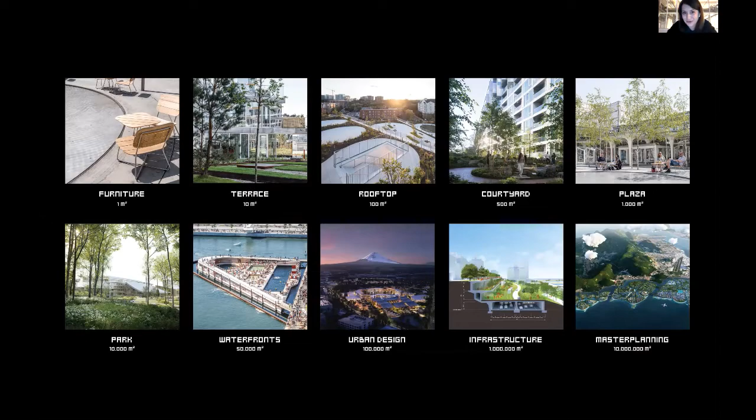We work on very different scales of projects, from bench scales all the way to regional master planning. A lot of our work actually integrates different disciplines. Of course, most of BIG's work is known for architecture and buildings, but we have been focusing more and more on really growing our landscape portfolio. I'm very excited today to show you a few of our works and how we actually work within our environment, which is extremely multidisciplinary.

I often joke that BIG actually started as a landscape architecture firm, which is not that wrong, because in 2002, even just before BIG started, we contributed to bringing people to the harbor of Copenhagen, transforming what was just an infrastructure for trade into an infrastructure for people. And also with the Maritime Youth House, we really brought people to experience the waterfront of Copenhagen.

We also tried in 2004 to really bring communities and residents to the rooftop of a cityscape. The historic city center of Copenhagen doesn't allow yet this type of public space.

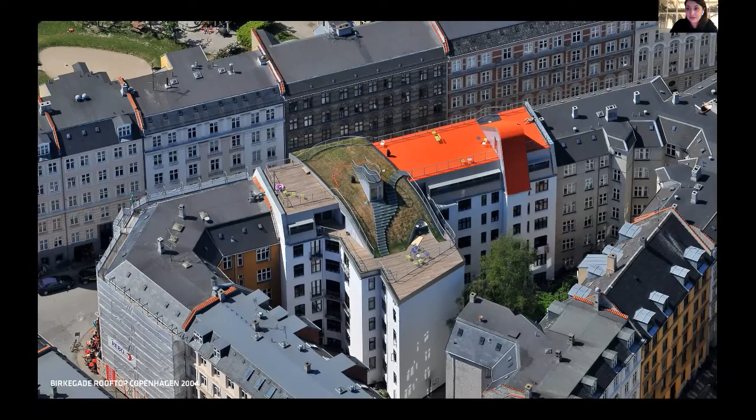We also started to reactivate forgotten areas in Copenhagen, like the Superkilen Square, where the diversity of the people living in the neighborhood has been brought into the public space with this eclectic mosaic of different urban elements that represent the different nationalities of the people coming together in this place they can sort of call home.

Our work really started at the beginning focusing on public space and landscape architecture because of the Danish sense of community. I'm living in Denmark now after New York, and I can really experience this sense of community and connection between the public here in Denmark.

But over time, BIG started to integrate more and more landscape and architecture together within the buildings, arriving to the point where we realized we had to break the silos, break the different disciplines, and start working much more closely with one another since the early design process to really try to tackle climate change and other cultural challenges we face today.

So in 2015, we actually founded BIG Landscape, and today we are working on different scales of projects that are tending to be more and more complex, addressing the future.

We call our world here at BIG the Big Leap, and we represent landscape, engineering, architecture, and product. We have all this expertise in-house, and we see the landscape team sits right between the engineering team and the product team and the architecture, and it's really nice how we can work together.

As landscape architects, we really have that kind of discipline that interacts with the different levels of design, from the architecture with landscape around the building, inside or above, with engineering, how do we build landscape on structure, how do we tackle the climate and the environment, but also working much closer with our industrial designer for product design, urban elements, and lighting.

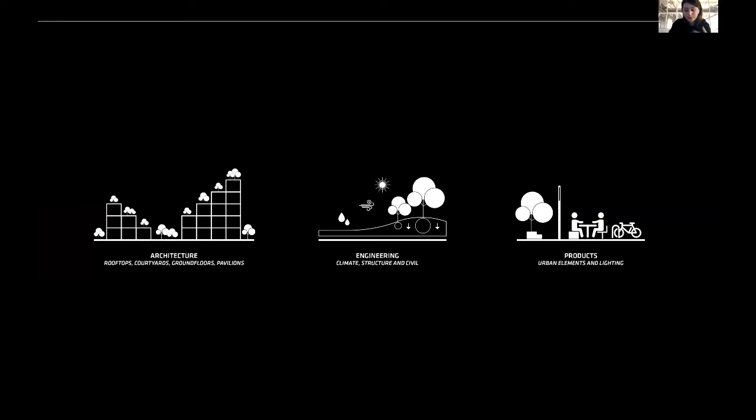And I will walk you through a few projects that go from the smaller scale to the larger scale that give you a sense of how we work here at BIG within our team.

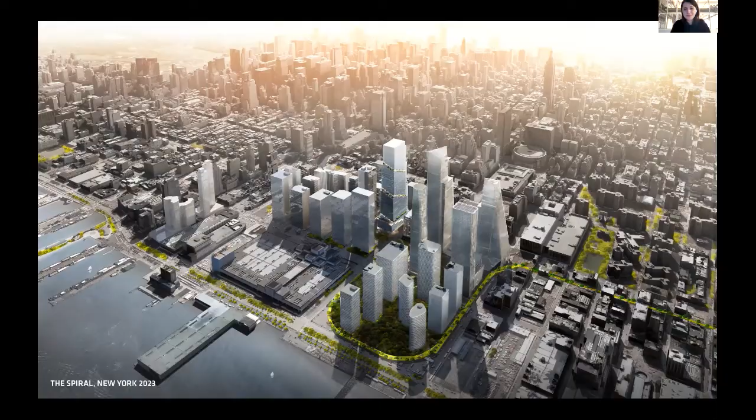This is the Spiral project. You can recognize the green spiral around the tower. It's in New York in Hudson Yards, and it's one of the tallest towers actually that are at the moment coming up in New York. What we looked at is creating a new form of public space, a spiraling terrace system that goes all the way up to 300 meters high.

That creates a different experience, almost a biophilic experience for all the workers within this office building, but at the same time also addresses sustainability and passive irrigation system.

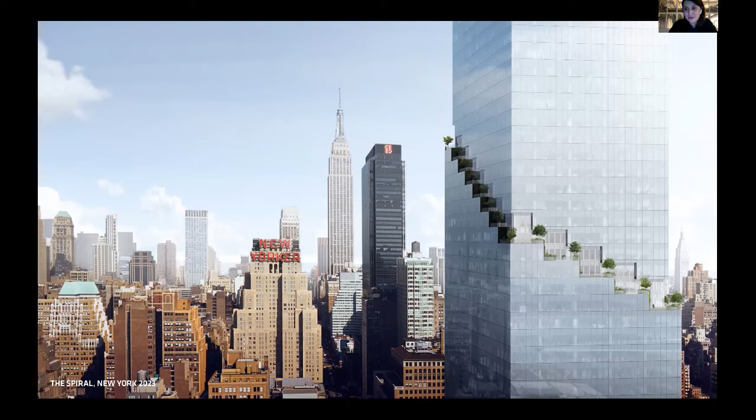You can see here that the skyline of Manhattan is really lacking open space, and you can see how the spiral can create a different type of public space within the skyline of New York, bringing nature also, not only people, all the way up.

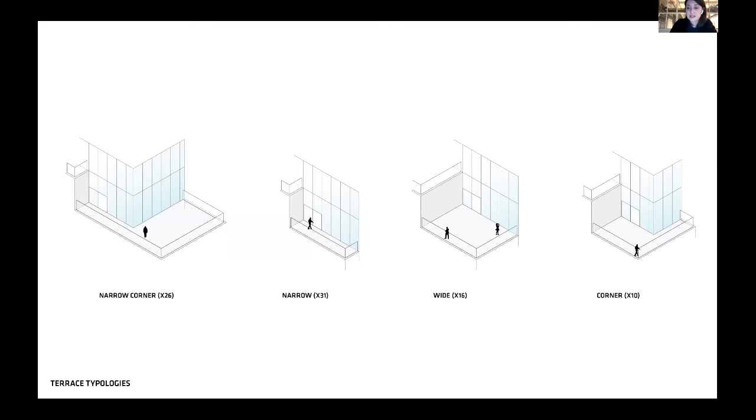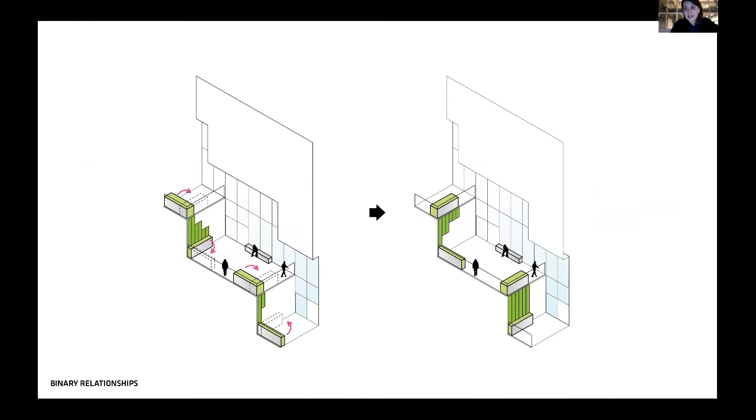The different terraces around the tower are very different, from large terraces to small terraces to corner terraces. What we worked on is a landscape concept that managed to bring nature, plantings, and people into these terraces, but also emphasizes this continuous terracing and the spiraling of the vegetation all the way up. We worked on vegetation on a horizontal plane, but also on a vertical plane, connecting the spiral to one another. You can see this continued cascading of green elements connecting all the terraces.

You can also see what we call the taco planters, planters that have the vertical side with exposed vegetation. Creating new types of public spaces, especially something that hasn't been done before, comes with a lot of challenges, such as code compliance, allowances for the facades, but also thinking about views and safety.

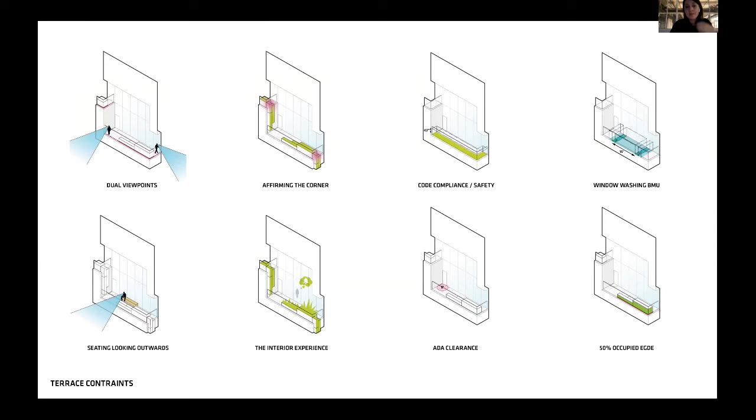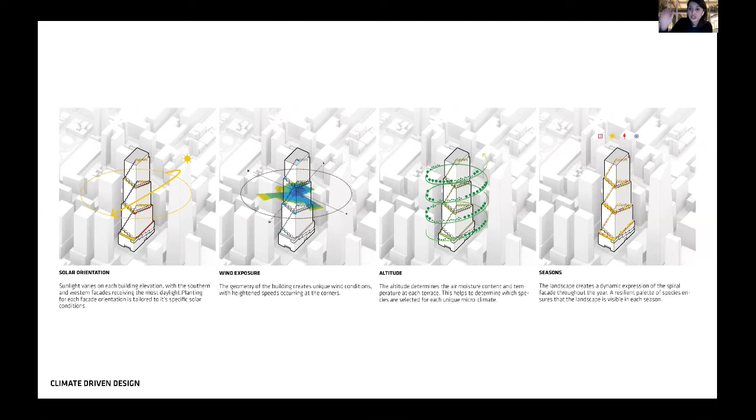Big challenges also come with the climate, because the climate really changes from the bottom to the top of the tower—it's really a different climate zone. Here's an example of how we work very closely with the environmental engineers, where we look at solar orientation, wind exposure, how the vegetation needs to change because of the altitude, but also the season and the time of day.

And we actually managed to simulate different scenarios of wind exposure or sun exposure to understand what type of climate these terraces have. And what we arrived at is that there are 3 different climate zones around the tower, each corresponding to a different planting palette, because we have a different exposure to sun and a different exposure to wind.

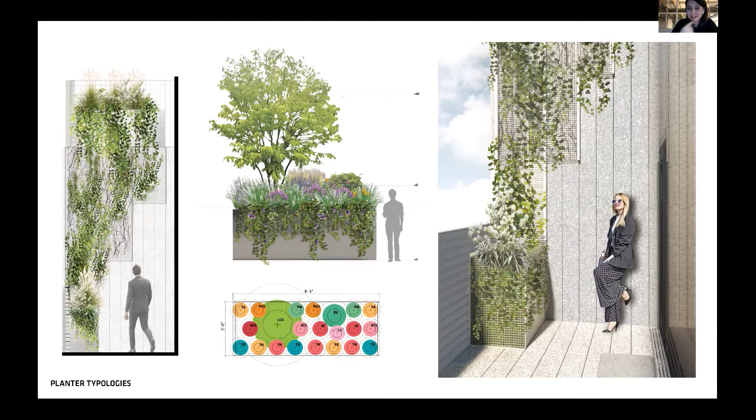And this planting palette actually goes from the planter all the way to the vertical elements and the trellis. So it's really like a continuous green spiral around the tower that adapts to the climate it encounters while turning around the tower.

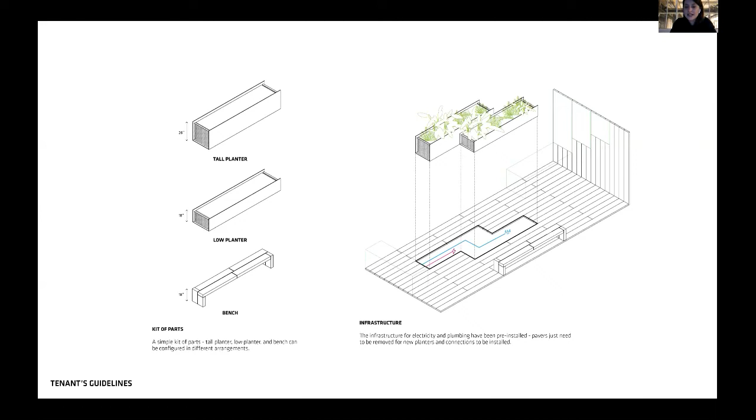We also looked at flexibility, because there will be different tenants leasing the different office spaces. So we looked at a sort of plug and play system where we create infrastructure such as irrigation and a structural load allowance for the planters, allowing different tenants to reconfigure the terraces as they would like over time.

And here you can see today, an image from a few months ago, of the spiral that just recently popped up in New York. You can already recognize the terraces in the facade.

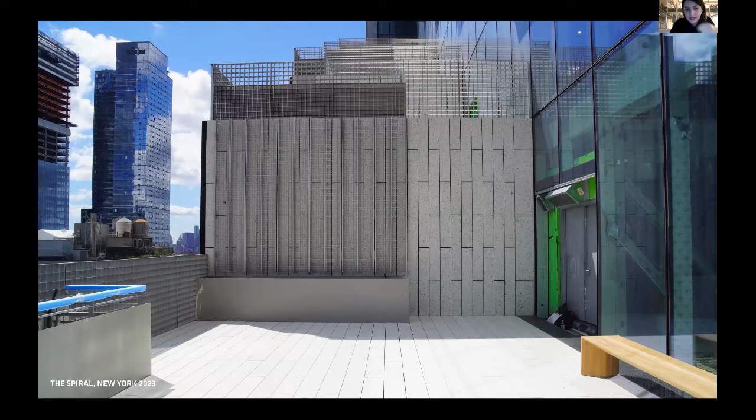And here you can see the first, the large terrace, where you can see already installed the planters with the trellis and the benches.

And we actually started a few months ago to test plants, so we can see how they behave in the different climate zones. And so far, so good.

And you can see in the photo the tall planter, what we call the tall planter, with the vertical side exposed. This is a small project, but it's a very different experience for the city of New York, not only from the skyline and from what you can see from the ground floor, but especially being inside a workplace and really having the opportunity to experience outdoor space at altitude that otherwise we wouldn't be able to do.

And I think the spiral is an example of landscape almost on top of the building, but we also have an example of landscape that goes on a ground plane. How do we extend the architecture and connect the architecture and the landscape on the ground plane?

We actually worked a couple of years ago on the Henning Kruse Plaza here in Esbjerg, Denmark. Henning Kruse is a renowned person within the Esbjerg community, famous for his contribution to the shipping industry. He founded a foundation for cultural programming, and he decided to restore the plaza in front of the music hall of Esbjerg, designed by Utzon, trying to find a way to create a public space that enhances the architecture that is there today.

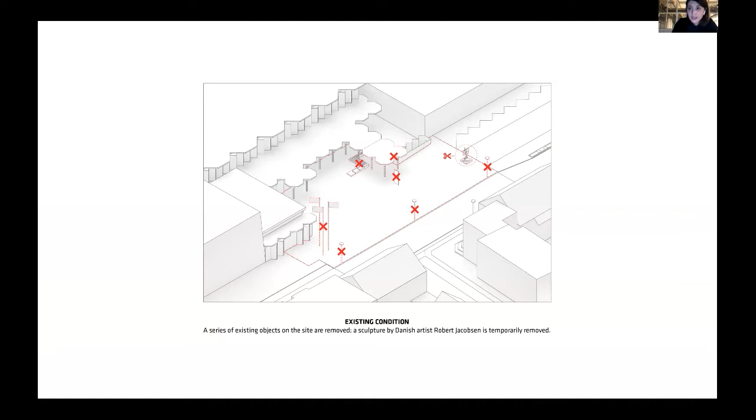So we actually looked at addressing the plaza design and how we create a city space that really celebrates the architecture. We started removing all the objects that were disturbing the space and were maybe not required. And we looked at this column grid, this colonnade that creates the buffer and the interface between the inside and the outside, and we extended this grid out.

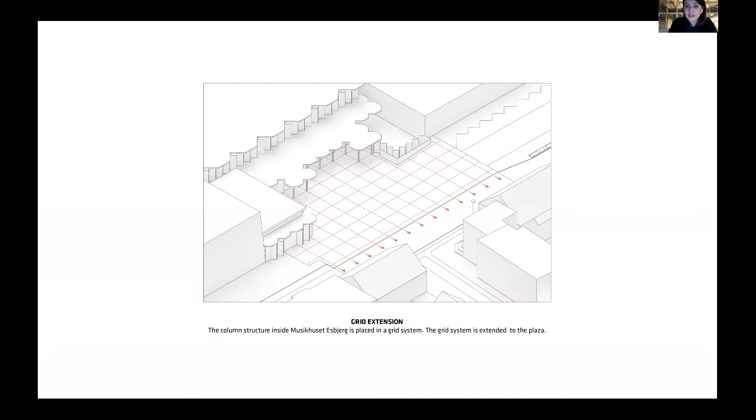We created a destination, which is what's missing today, an element that really marks the fact that it's a new destination for the city and gives importance to the city space. In this case, we created a fountain, a wave pool, which we'll see later.

And like almost an extension of the columns all the way to the outside of the plaza, we located birch trees that are modified in order to not allow for allergies. We really created this extension of almost a natural colonnade that comes all the way out to the plaza and becomes a vibrant urban space that keeps the hardscape on the ground plane, but also creates this canopy layer that continues the colonnade outside.

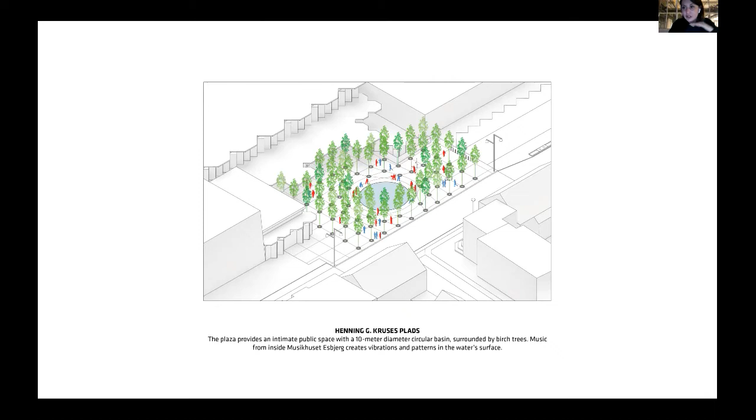And here is an image from above where you can actually see the grid continuing out and distorting to create and embrace almost the central element, the wave pool.

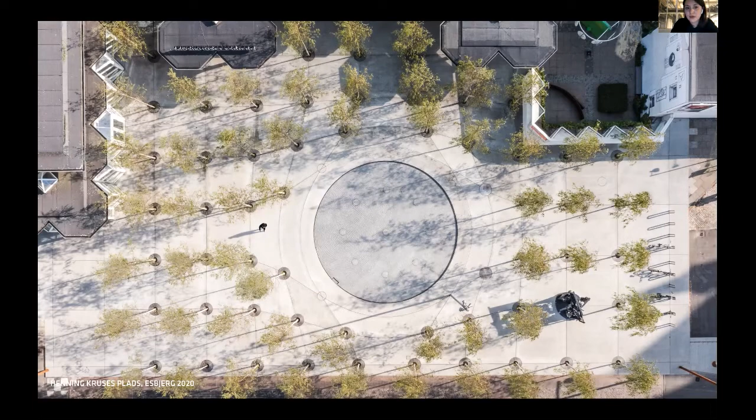And actually the entire plaza is conceived as a planter, so it's fully on structural soil. And each tree is actually sitting at the intersection of the steel plate within the pavement, which is the exact same treatment of the columns on the inside of the building.

And here you can see the relation between the column with the canopy with the tree. So this kind of extension where you almost cannot tell the buffer when you are within the landscape realm or within the architecture realm.

And people are really enjoying the space, especially in summer where it's warm enough. And really the fountain, the wave pool really brings people to the site.

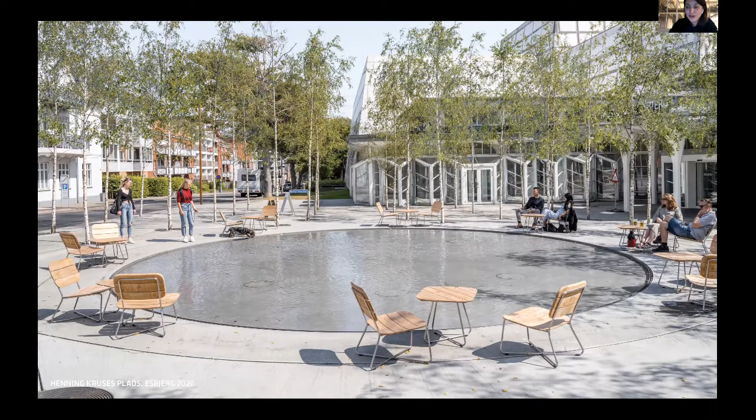And you can see that the pool actually has this sort of ripples over the surface, and these waves are generated by vibrations that come from the music hall of the theater. So through speakers and other devices, we managed to translate the music that you wouldn't hear from the outdoors as a visual effect within the plaza, to try to connect in an even stronger way the indoor and the outdoor of the space.

Here you can see the detailing of the pool and how it meets the pavement. And in the same way as the indoor, the column of the building actually sits at the intersection of the floor tiles, we created a same experience on the outdoor, where all the different elements of the public space are extending the same logic and sitting in between the steel edges of the square.

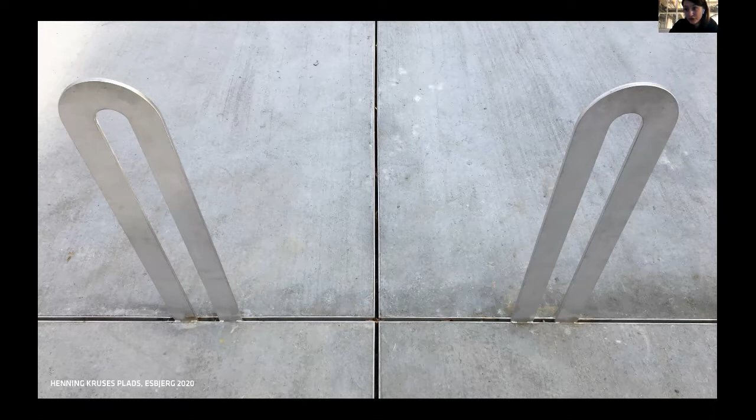And I think what's interesting is actually the Henning Kruses Plads is landscape that comes after a building is built. But we also have examples of how landscape comes before the buildings are built, or why the buildings are built.

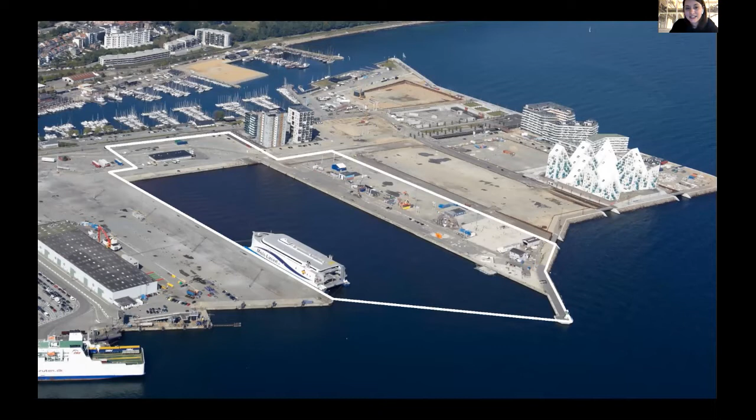And this is the Harbor Bath master plan in Aarhus, where we actually had to develop a master plan in the harbor area. And we really looked at the waterfront experience and understanding how can we bring people to the waterfront, how can we create a sense of destination that really was not there at the time before the intervention.

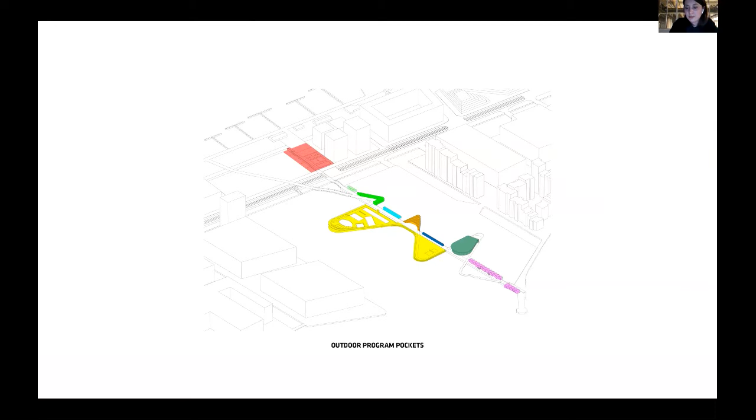So from a linear kind of waterfront experience, we looked at a much more dynamic waterfront experience that creates sort of pockets of public spaces and different activities. They can really create a sense of destination, a place for people to come and be and enjoy the waterfront and the relation with the water.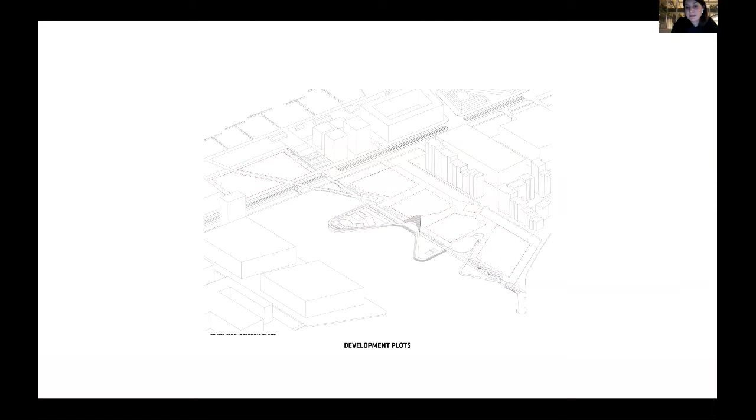And just right behind this dynamic waterfront creates the 4 city plots that then are filled in with the building envelopes. And we carefully shaped the building envelopes in order to allow for privacy, but also the perfect amount of daylight along all the facades.

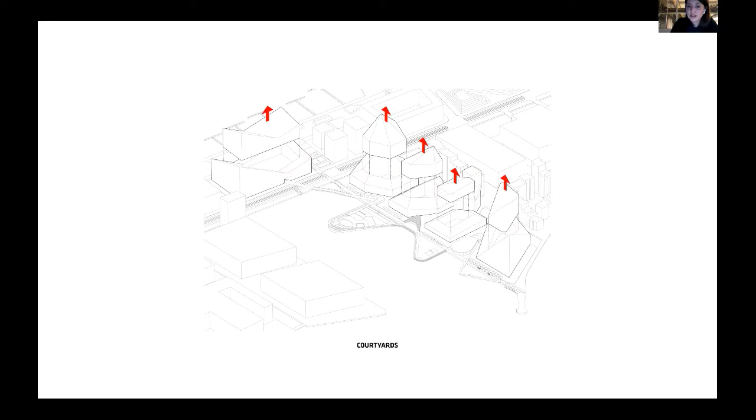And we also looked at creating courtyards, so then there is a sort of transition between the private space inside the courtyard and the public space on the outside. It really becomes a place where the ground plane is very active, but also there is a strong distinction between what is public and active and what is more passive and secluded, like the courtyard space inside the residences.

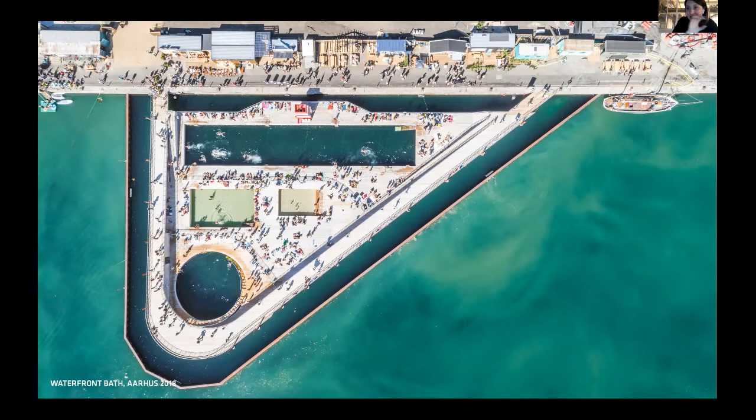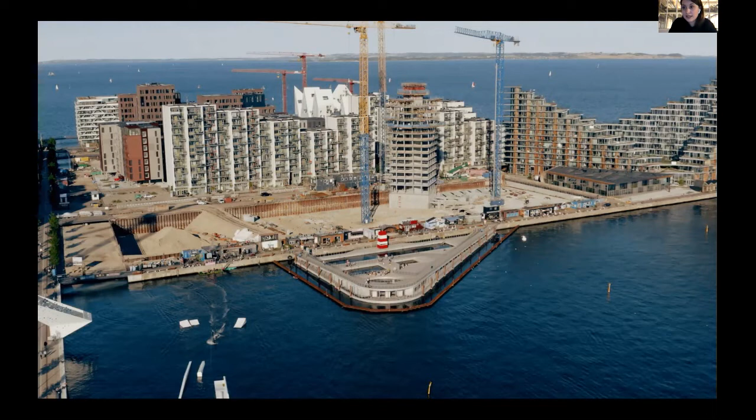So here you can see the Harbor Bath with just behind the small containers and little cabins that are actually bringing program to the waterfront and activate the waterfront since day one. But at the same time, they kind of serve as a barrier, a wall that protects the construction site at the back while allowing people to experience the waterfront during the construction.

And BIG is actually in charge of the 3 buildings that you can see behind, while the 2 courtyards have been developed by other architects, and we have developed with the landscape team the Harbor Bath in the front. And we will develop all the sidewalks once the buildings are ready.

And another example is actually projects where the building is already there, and we sort of need to work with the public space around it to really activate maybe areas of the buildings or the facades that are not activated today.

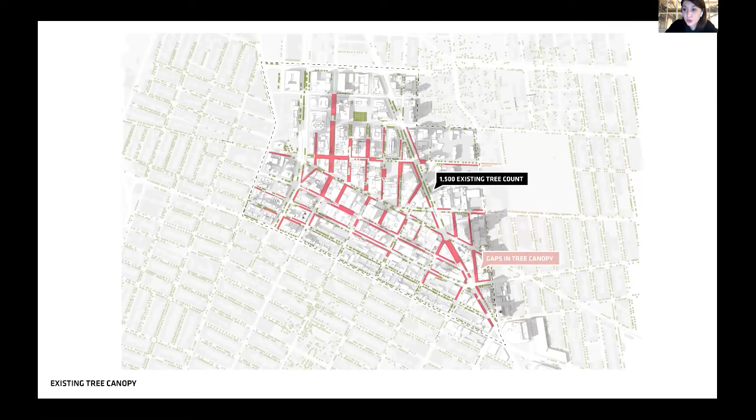This is an example in downtown Brooklyn, where we worked on this 350-hectare master plan. You can see from this image how gray and built the core of downtown Brooklyn feels, lacking not only trees but also public programming along the street and sidewalk. Our first design approach at a master plan scale was to find a way to integrate as much greenery as we can.

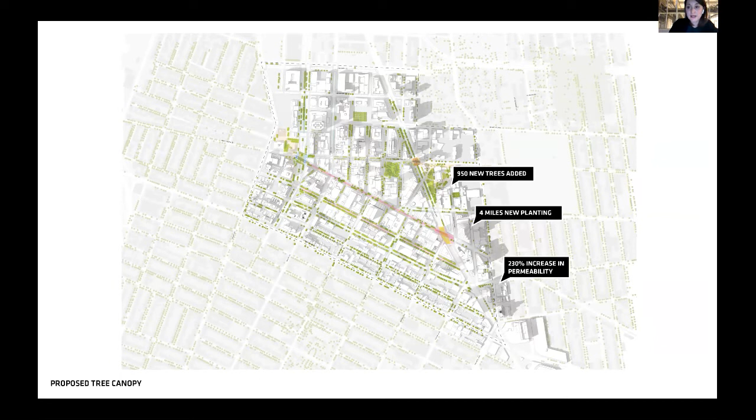It comes in various forms because of constraints that exist today on the site. For instance, where there are utilities or sidewalks, it should be in raised planters. Maybe we have areas with blind walls that we can activate with green walls, or other areas where we can work with bioswales and in-ground planting.

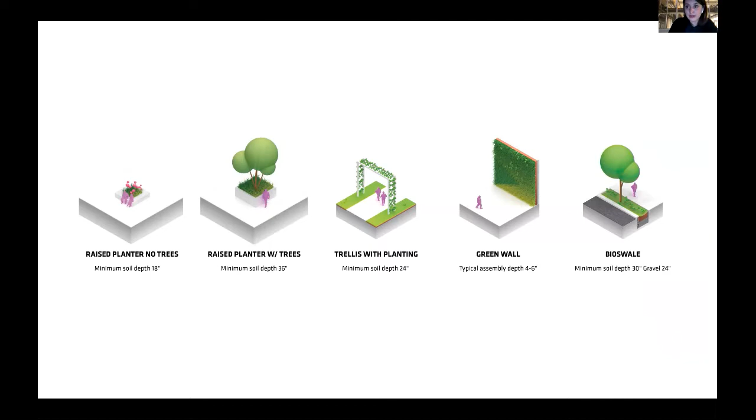We also looked at not only activating the sidewalk, but seeing how much traffic we can reduce in the streets of downtown Brooklyn. Today, or as of last year, there were only 3 to 4 shared streets in the whole neighborhood. We looked at ways to maximize shared streets by removing parking wherever possible and closing down streets where traffic would allow.

We looked at the block in a different way, because the sidewalk today feels just like a place to move around, an area to pass by. It doesn't feel like a destination. By offsetting the sidewalk and taking over parking space wherever possible, there's an opportunity to soften the edge of the sidewalk, making it feel like a plaza rather than a sidewalk—a core destination within the public realm.

We were interested in creating a much more playful environment rather than the gray landscape it is today within the downtown Brooklyn area.

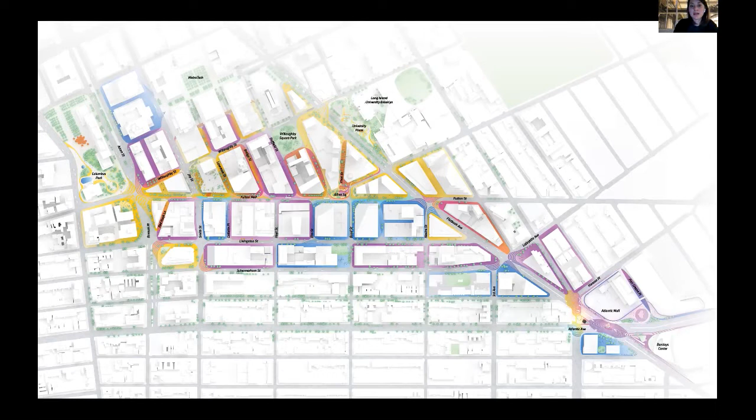Each of the colors reflects the programming happening around the building, creating a sense of connection between what happens on the ground floor and what happens in the street. We looked at different colors, different materials, and different forms to create a cohesive image for downtown Brooklyn while still allowing for diversity.

In areas where there are more residents, it could be a little more playful and soft. We played with curves and soft elements that can really activate the street.

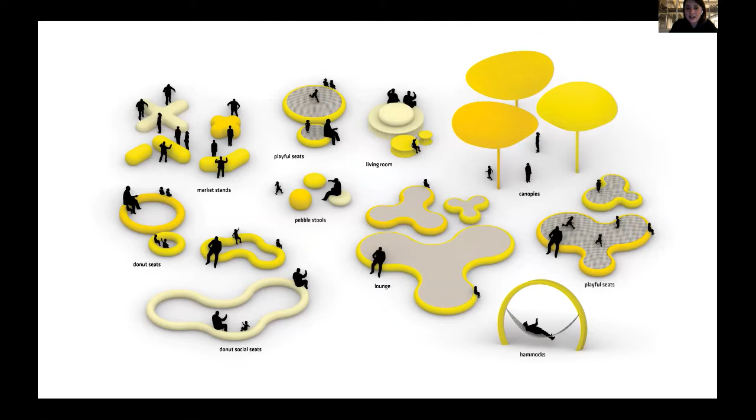For the blue zone, we looked at a more slender, tube-like form with movable elements that create a very dynamic feeling, much of it relating also to sport.

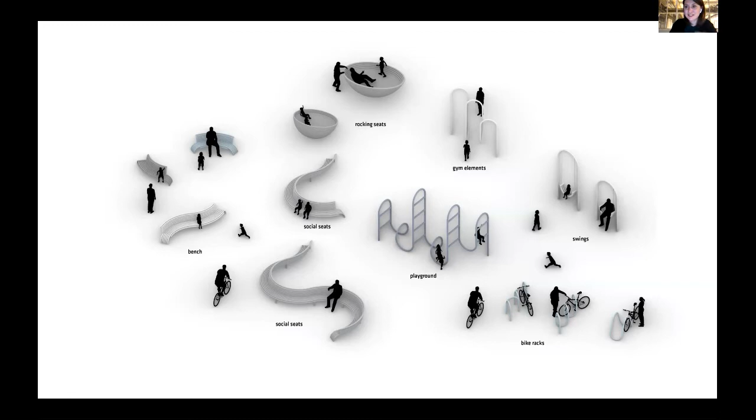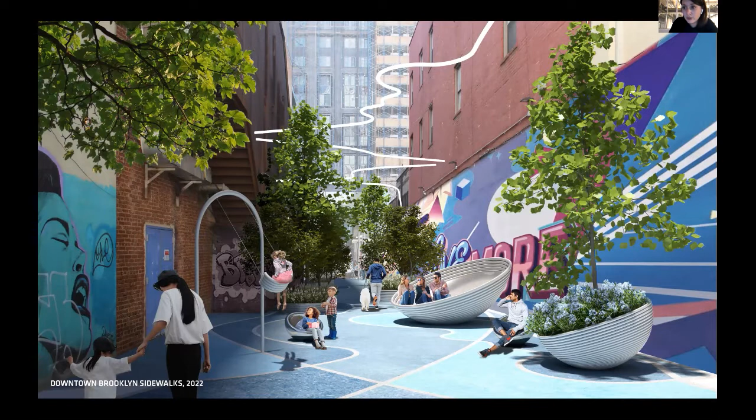This is an example of an alleyway. You can see the same condition—no programming on the ground floor—but also an opportunity to create almost a public courtyard for everyone to enjoy the landscape, like a playground for the residents around the blocks.

We also looked at other forms, maybe more urban elements that are much more linear, and perhaps built out of wood.

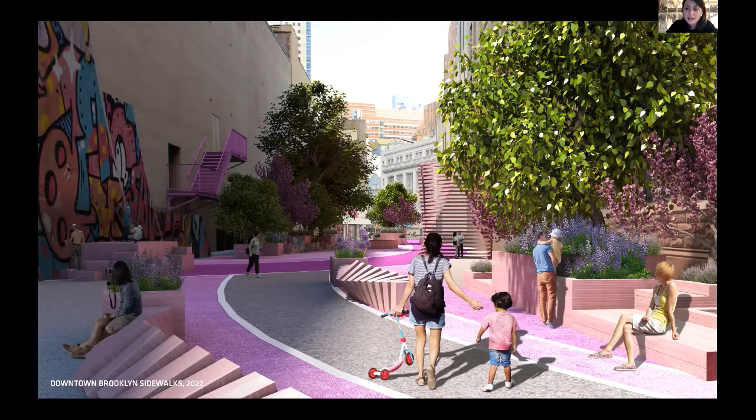This is an example of another street in Brooklyn, again with a lot of parking and no activation on the facade. This furniture, along with removing the parking and creating a more meandering flow, can really change the experience of the street.

This was a very interesting process. We worked for a year together with the Downtown Brooklyn BID on the vision, and this translated into 8 pilot projects.

We have designed the pilot project that you can see here in the middle of the image, while the one close to Barclays Center, in the bottom right, is being designed by WXY architecture office.

The main challenge was actually that we needed to create an implementable phase of the master plan. So this kind of bubble landscape needs to work in an area where there are different stakeholders and different building owners, and it needs to be built over time. Some of the projects might be more temporary, and some could be more permanent.

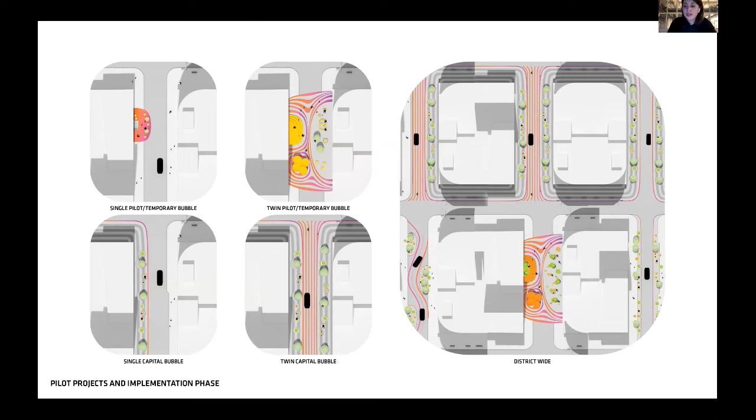So what we look at is a difference in scale of what we call bubbles, from small bubbles that are almost temporary, creating a sense of playfulness and destination, to bubbles that extend all the way around the block whenever possible.

This is an example of Hoyt Street. You can see on the left side what it looked like up until a few months ago, with a lot of parking space and a very reduced area for pedestrians and the sidewalk. On the right side, you can see how we tried to implement as much green as we could given the constraints, while also reducing the space for vehicles in order to widen the streetscape.

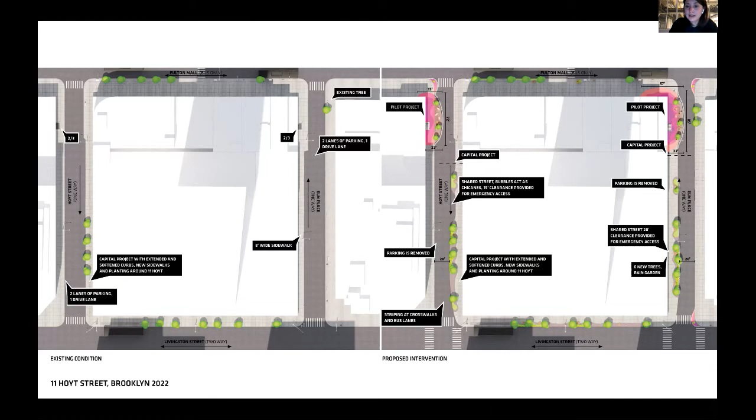Every urban element placed on public ground needs to be approved by the DOT and PDC, the Planning and Transportation Department of the City of Brooklyn and New York. So we worked to downplay the toolkit we originally had and incorporate more off-the-shelf elements. We also had a lot of discussion about colors with the client and developers and stakeholders around the area. For now we have gray, black, and yellow allowed, but over time I think we hope to integrate more and more elements to this toolkit.

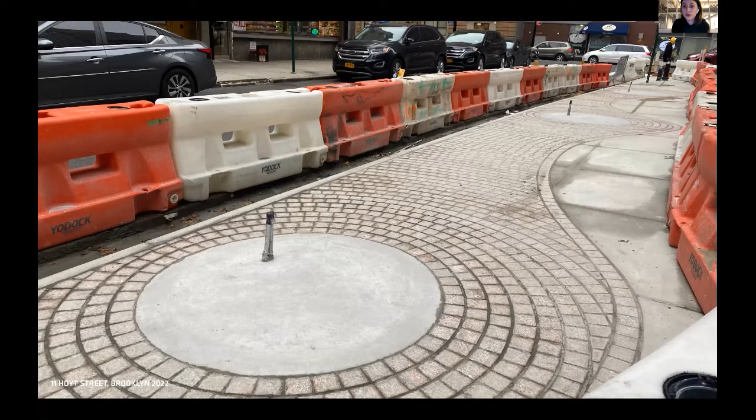So we now have a first series of urban elements that can be activated and placed around downtown Brooklyn. This is an example of a client who really wanted to create a much more permanent public realm. So rather than using color and paint, we worked with pink granite to create this kind of soft shape, instead of with paint or colors, actually with stone.

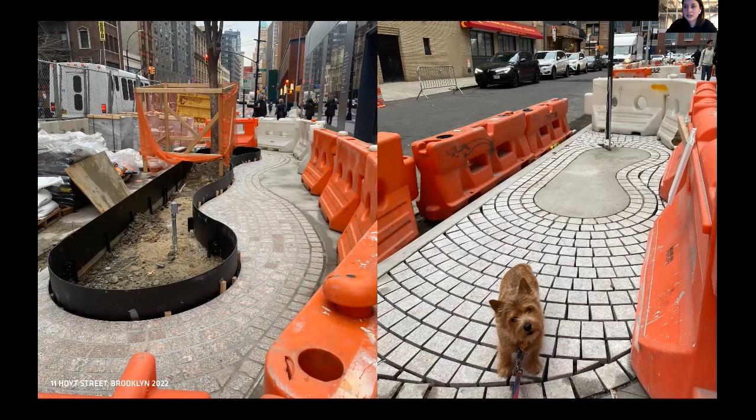You can see here the area for the raised planters to be located, but also the areas where planters can happen in-ground. So here's a comparison between in-ground planters around existing trees and new plantings that will be added, but also planters above ground where there's a subway below, or utilities that don't allow for that.

This is the first of the 4 sidewalks that we are designing, and it will open in just a few months, with 2 more coming this year. We are really excited to see how the overall vision has been broken down into small pilot projects that are being implemented over time around downtown Brooklyn, and hopefully in a few years the full puzzle will be completed.

And I wanted to conclude with a project that I think represents, probably at best, the way we integrate landscape architecture and architecture and other disciplines at BIG, but also how we can think about projects most of the time starting from the landscape perspective rather than the architecture.

This is Toyota Woven City. We were asked by Toyota from Japan to think about a different type of city designed for autonomous vehicles. They had a site available in Susono, just 1 hour south of Tokyo, where we had to design a city from scratch. The brief was: how would the city of the future look if autonomous vehicles replaced automobiles as we know them today?

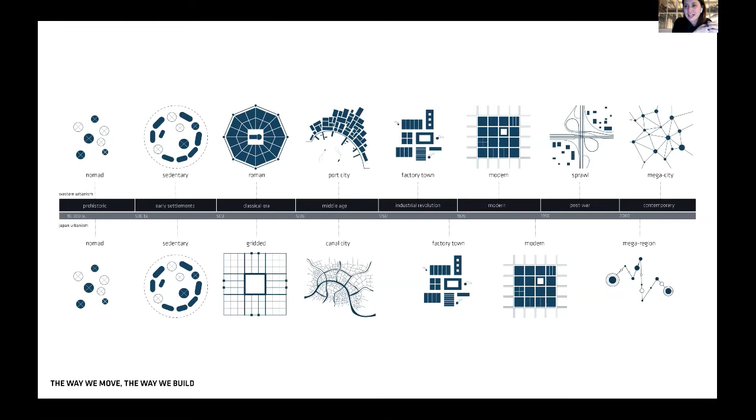What we actually started studying is how mobility has shaped the city that we live in today, from the past all the way to today and maybe the future. Of course, the medieval city was really designed by pedestrian flows and people inhabiting the space, connecting major points and plazas within the city.

The organic pattern became more and more segregated from the boulevards, allowing for much more life but also for horse carriages in Paris or Barcelona. Then, of course, roads and grids became much more efficient and functional for cars, all the way to highways that really disconnect and separate neighborhoods. We looked at automation as a way to rethink mobility and bring back people and other forms of mobility to the city, much more than cars.

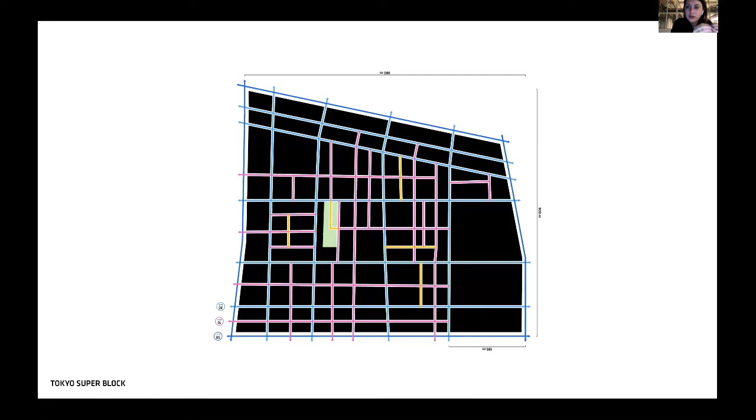This is an example of the urban block in Tokyo. You can see the different streets - there's really a fine grain of different streets, from the large boulevards with cars and traffic components, all connected to the main subways, to different types of public space where you find very human scale, very active little streets with extreme charm. I think it's probably the most beautiful part of Tokyo - but also residential streets that are extremely green, where you almost feel like you're in a park.

We were really inspired by the diversity of streets. We thought, rather than looking at autonomous vehicles being implemented in streets as we know them today, what if we rethought mobility and looked not only at cars, but also bikes, other forms of mobility, and pedestrians as well.

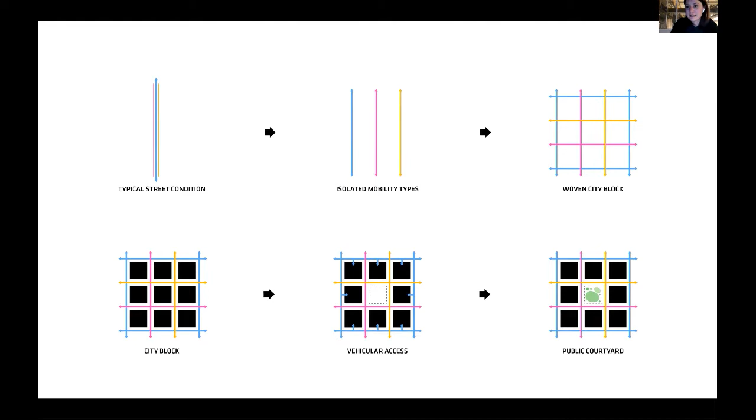So we split apart the streets as we know them today - the vehicular road, the sidewalk, and the bike lane - and interwove them in a different way, creating a 3 by 3 grid, almost like a Sudoku grid, where you access 8 of the blocks from the vehicular road running on the perimeter. The block in the middle, not accessed by a vehicular road, we turned into a public courtyard where the bike lane and pedestrian lane frame this area, with the 8 buildings around becoming the building blocks framing the central public space.

This is the city block, which is 150 meters by 150 meters. If you just multiply it, you could form a city.

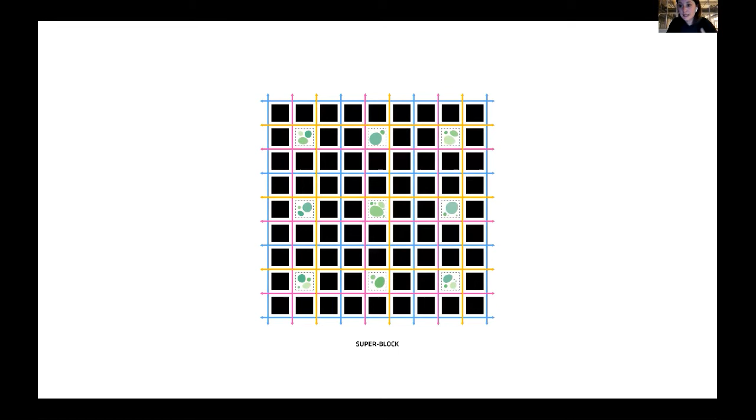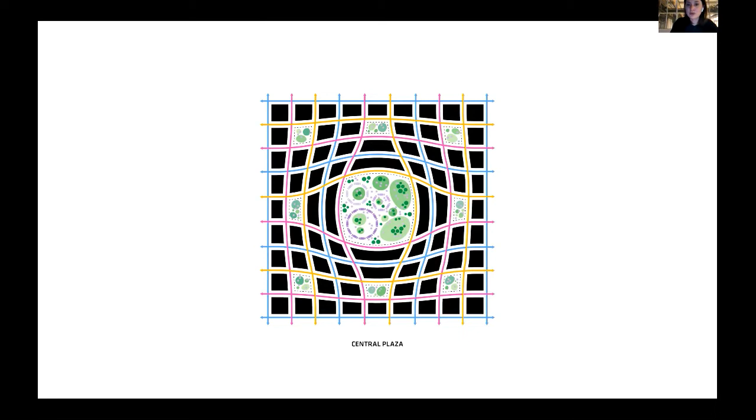But then we also looked at the necessity to create a much larger public space - what if it's a plaza or a park at the scale of the city, not just the scale of the block? So we looked at distorting the grid. By distorting the grid, we allow every street to be continuous, but at the same time we allow a very different dimension, size and type of public space, and also for the buildings. It really creates variety by never disconnecting the grid.

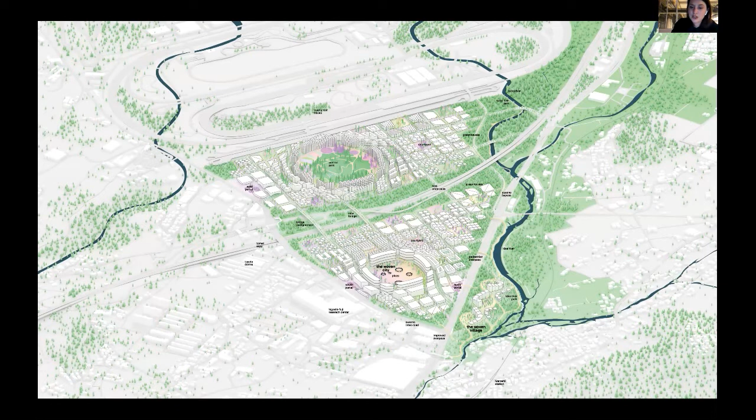This is where the Toyota Woven City concept comes from. You can see here the implementation of the 3 phases of the project - we're currently in phase 1, the first triangle in front, which is under construction. What's interesting is that it becomes a city where not only is mobility equal between cars, bikes and pedestrians, but the amount of nature and the space dedicated to building and to mobility is almost equal, almost 30% each of the cityscape.

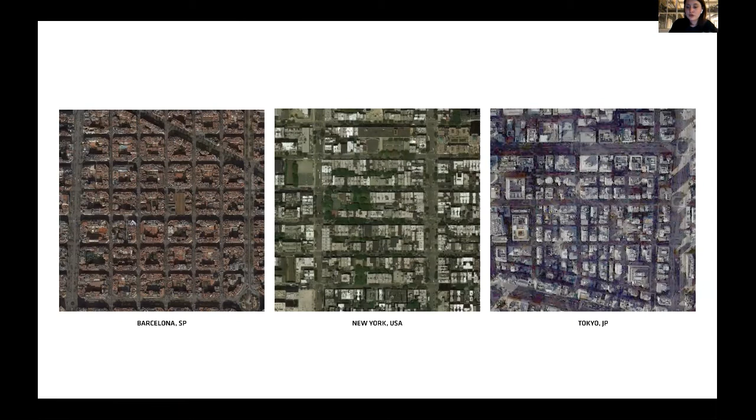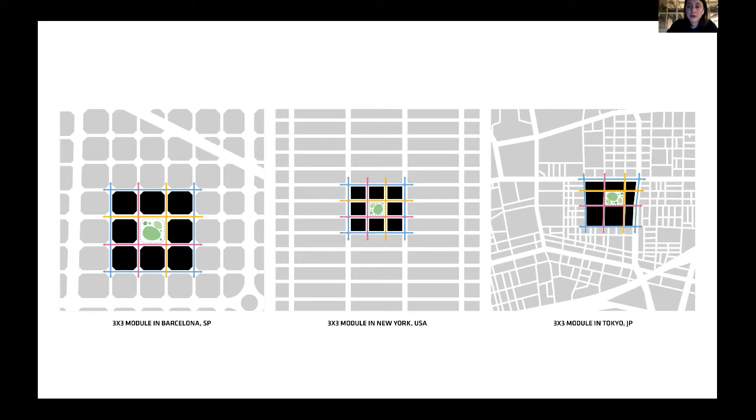We also looked at the grid as a way to think about the city of the future as a model every city of today could retrofit to. You could imagine Barcelona, New York, or Tokyo closing down certain streets from traffic - which is actually what we experienced living in New York during COVID. A lot of streets closed down and turned into completely pedestrian areas. That's something interesting about the city of the future - something every city can retrofit to, without always being designed from scratch.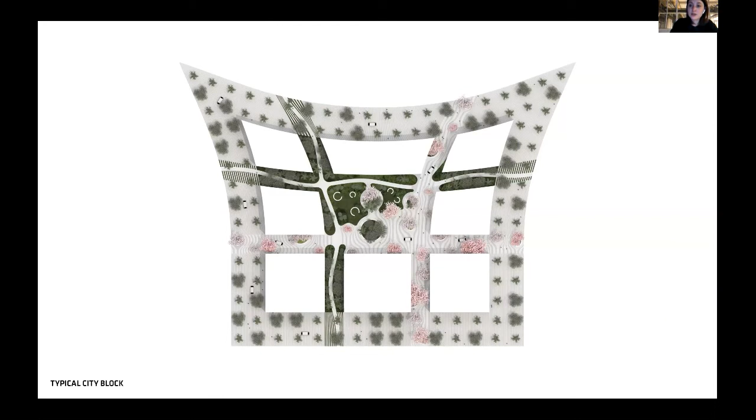Here you can see the model - all the courtyards and public space of the city, and how everything is extremely interconnected. You can imagine pedestrian streets letting you walk along the entire city, connecting all the courtyards and plazas. This is an example of the scale of the courtyard within the eight building blocks, where we designed 3 streets in 3 different ways, blending the more natural component of the pedestrian street with the more civic component of what we call the promenade for bikes and pedestrians.

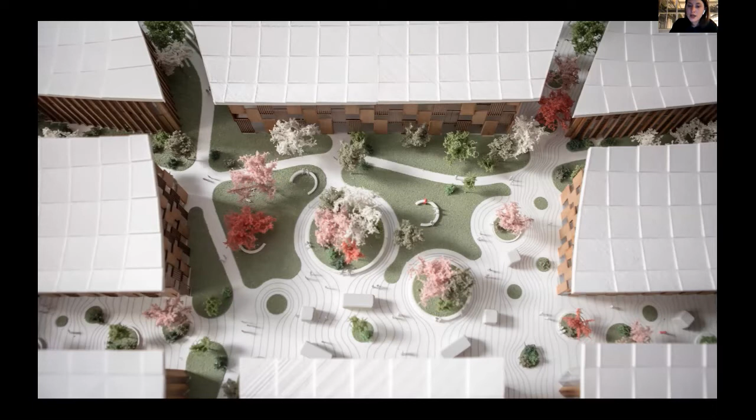And here you can see really the scale of the public space, and also the kind of ratio between the softscape and the hardscape that allows for a very natural environment, but also an area that can be very functional, where vehicles can access where they need to.

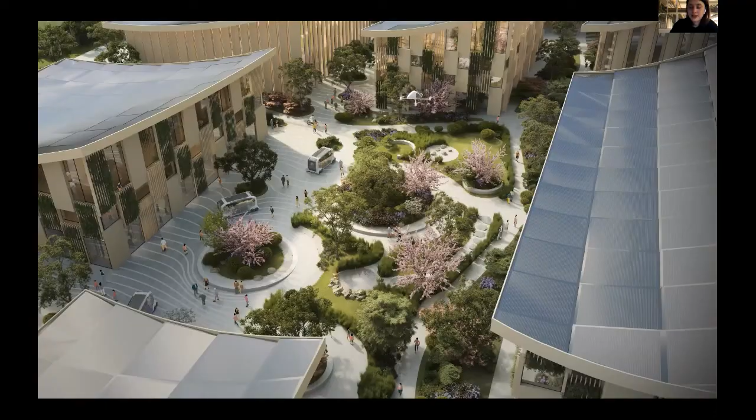Here's another view of the courtyard, where you can actually see that it's almost designed as a Japanese garden. You can also see already here that the amount of technology you see is actually limited. So we really focus on designing a city and a public realm that feels very familiar, that everyone could feel connected to, and the technology is mostly hidden and just helps the city perform much better.

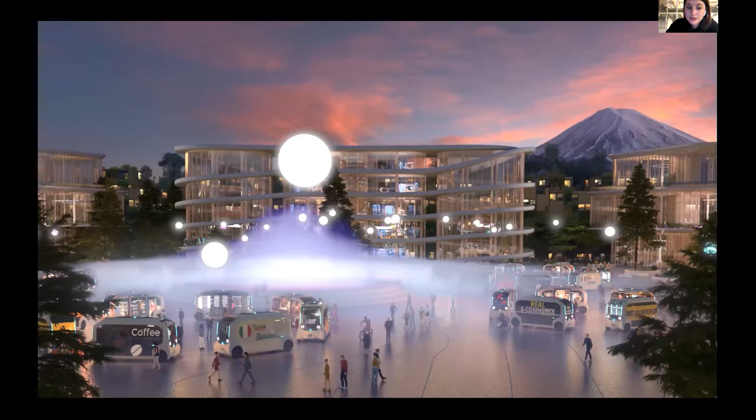Also, what we looked at is new forms of retail. So we actually looked at mobile retail, where you can see on the right side what Toyota calls the e-palette. It's almost like an autonomous van that has different programming in the interior, and can really activate the public space in very different ways, allowing for flexibility and different events happening throughout the day and throughout the year.

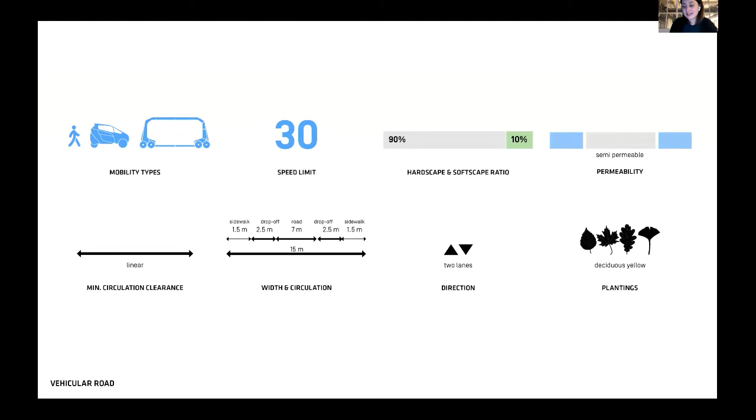This is an example of the vehicular road as it was designed three years ago. You can see that it's mostly a street dedicated for vehicles. There's no need for curbs with autonomous vehicles, so it's just a tree line that defines the difference between the sidewalk and the vehicular lane. You can see the waste management that happens below ground. This is a street where we actually tested a maximum of 30 kilometers per hour speed, which allows interaction between humans and an autonomous vehicle, something that has never been done before.

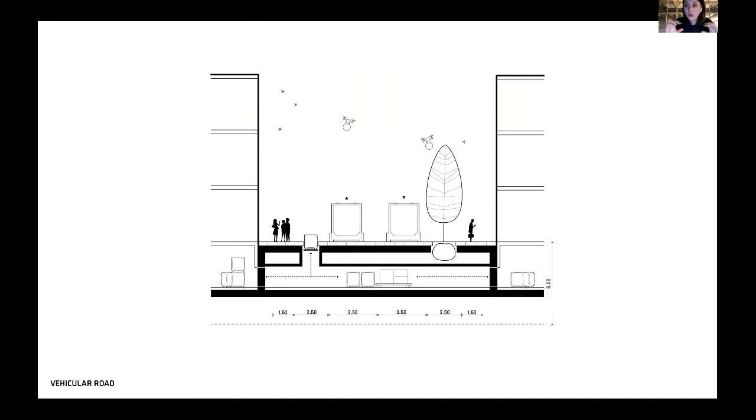You can also see the drop-off area, where just a line of trees creates the distinction between the pedestrian and vehicle road, as well as the drop-off area. And you can see what we call the Toyota Logistics System—everything that relates to delivery or waste happens below ground and connects all the residences behind.

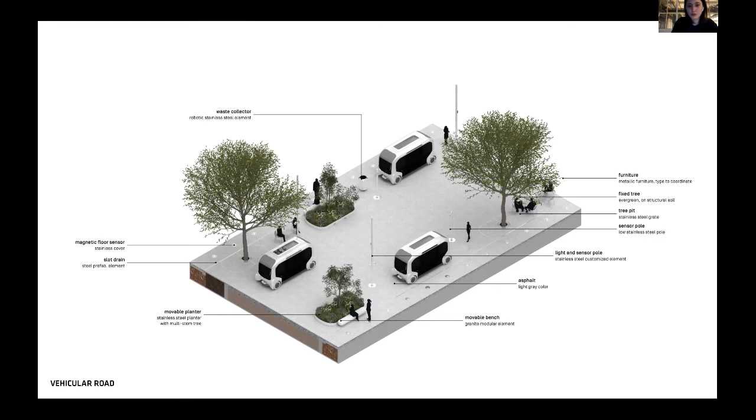This is actually an image from our DD set. We just completed the DD phase a few months ago, and we're currently moving forward with the construction documents of the public realm of the Woven City. That's a sketch of the latest rendering of the vehicular road, but we really had to work with the client to understand how to allow flexibility and variety of planting in the street.

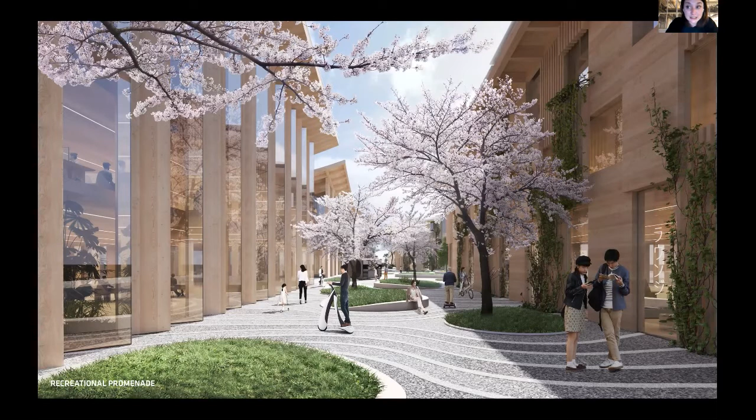This is the recreational promenade, a much more meandering street where you tend to slow down, for bikes and scooters to experience the city at a different speed of 15 kilometers per hour—much more dynamic. We thought that to represent dynamism, we wanted cherry blossoms and flowers to really represent the character of the street, and you can see the paving pattern that highlights the dynamism of this street.

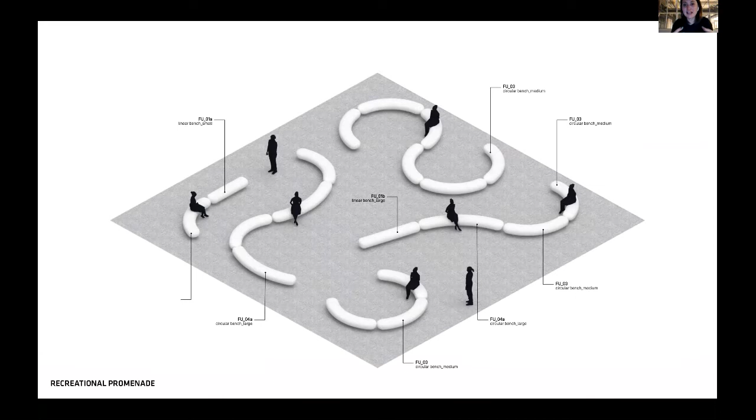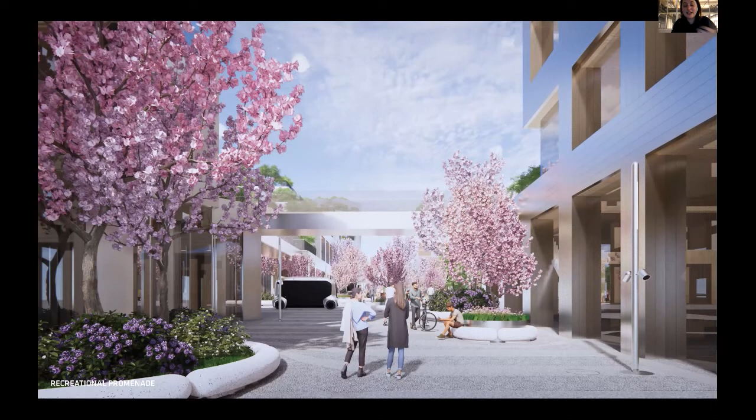Here's how it looks in the latest development of the design. We really had to work with movable elements to allow flexibility for Toyota to test different speeds and different ways to meander around the city. Lastly, the pedestrian street is conceived as a continuous linear park—a meandering street between nature, with a minimal path and vegetation towards the building, allowing you to feel really lost in nature even in a complete urban environment.

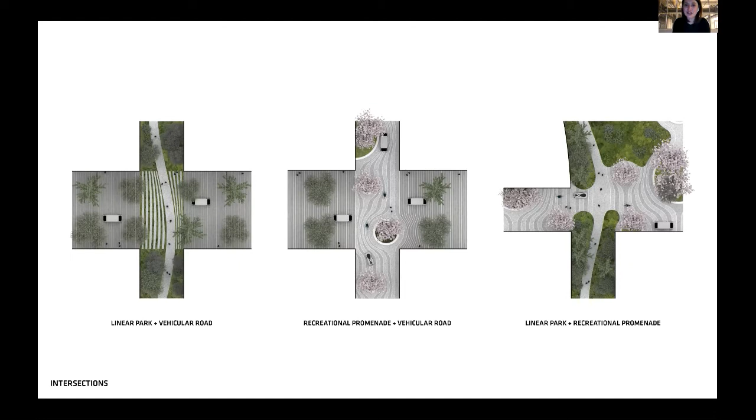What we think is successful is that the Toyota Woven City creates a separation between modes of transportation and mobility, but at the same time connection, because we allow, through sensors and technology, to really test for the first time how people interact with autonomous vehicles. That's different from how the interaction between humans and autonomous vehicles is tested today, and the Toyota Woven City will allow a different way of testing autonomous mobility.

What is relevant is that even though it's a city born out of the necessity to retrofit for autonomous vehicles, it has resulted in a city that has much more space for people and for nature. I think this represents a lot of the work we do today, where we try to rethink cities in order to create a much better environment for the planet and for humanity.

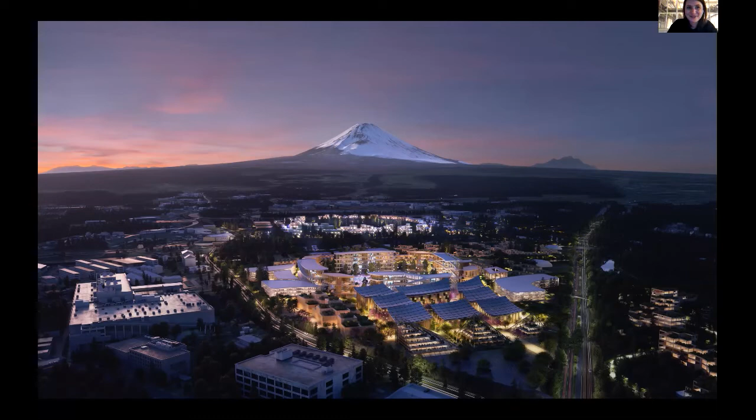Fantastic. Thanks, Giulia. That was a bit of a whirlwind. I sort of feel like I was in drawing and diagram heaven there. Great presentation and great drawing. So thanks very much.